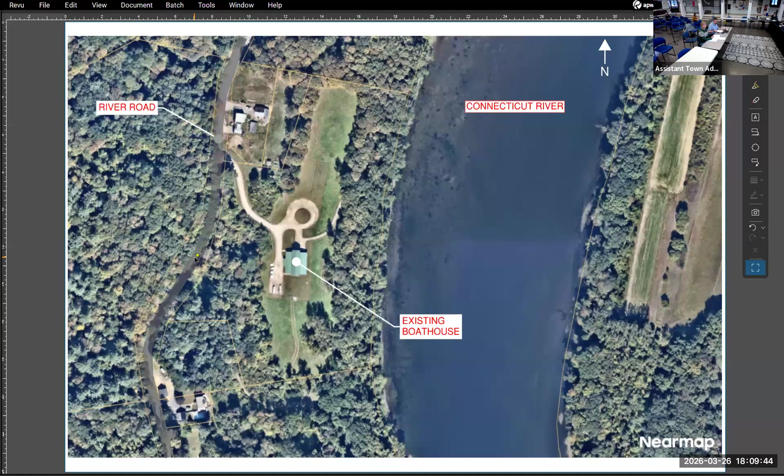This evening's project is the Deerfield Academy Boathouse, situated at 518 River Road in Deerfield. As shown on screen, this is the existing site. North is the top of the page. River Road is on the west side, and the Connecticut River bisects the middle of the screen.

Now with the page oriented north, this is the existing conditions plan. The Connecticut River is now at the bottom of the page. Our area of work is situated to the north and south of the existing boathouse and along the west side.

The Academy is proposing to install a new shed for storage of crew boats during the winter months, as well as remove a small portion of the gravel driveway just north of the existing boathouse and replace it with porous bituminous pavement for washing down the crew boats. The grass circle in the middle of the gravel turnaround will have its loam removed and replaced with gravel removed from establishing the porous bituminous pad.

Stormwater management for the project will be accommodated through a bioretention swale located just east of the storage shed, highlighted in blue, south of the existing boathouse. The porous pavement pad itself will offset stormwater runoff from washing activities, as it sits on a full gravel substrate that will accept all that stormwater.

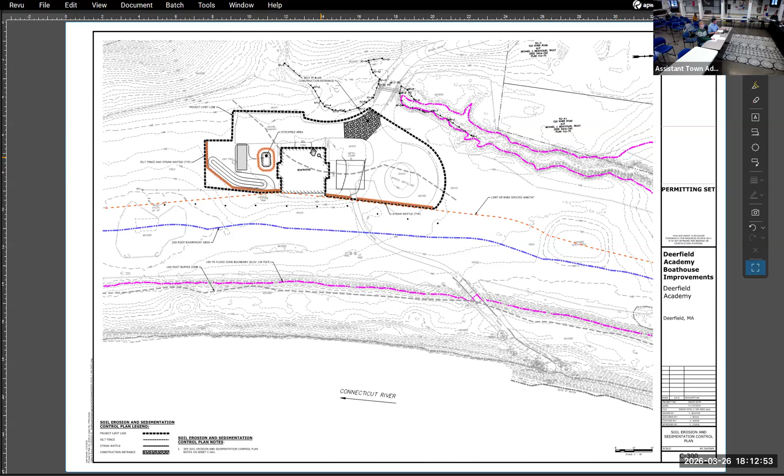Any questions from the commissioners? Before you ask, I'd point out you can see in this shot the limits of the riverfront, the 200-foot riverfront, the 100-foot buffer zone on the lower side, and on the top side, right on the border of their scope of work, on the bottom side is the limit of the rare species. So everything proposed is being done outside of those jurisdictional areas. It's a little hard to read the font in our meeting packet, so I just wanted to point that out.

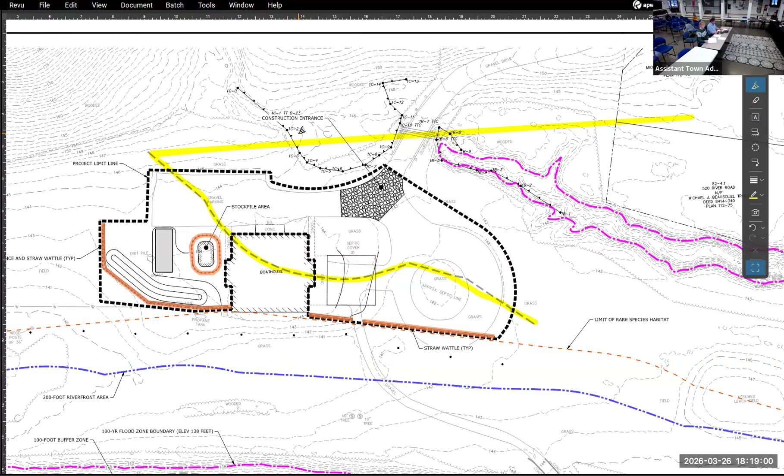John Libby: I'll make a motion for the RDA Deerfield Academy Boathouse application at 518 River Road to be a -2 determination with the use of the standard Deerfield order of conditions. Motion by Ben Byrne—I'll second. Okay, we got a motion and a second. Any further comments from the commissioners? Seeing none, then there's a motion on the table. I'm going to take a roll call vote to accept that motion.

Sean Libby—John Libby, aye. Ben Byrne—Ben Byrne, aye. Kate Devlin—Kate Devlin, aye. Pete Law, aye. Thank you very much. So that's good, -2, and we'll get that put together. Great, thank you. Thank you.

All right, thank you both very much, appreciate your time. The next item this evening on the agenda is Mass DOT, 5 and 10 in Mill Village Rotary. Considering a notice of intent filed by Mass DOT District 2 for intersection improvements on Greenfield Road, routes 5 and 10, at Mill Village Road and North Main Street, Mass DOT project number 613708.

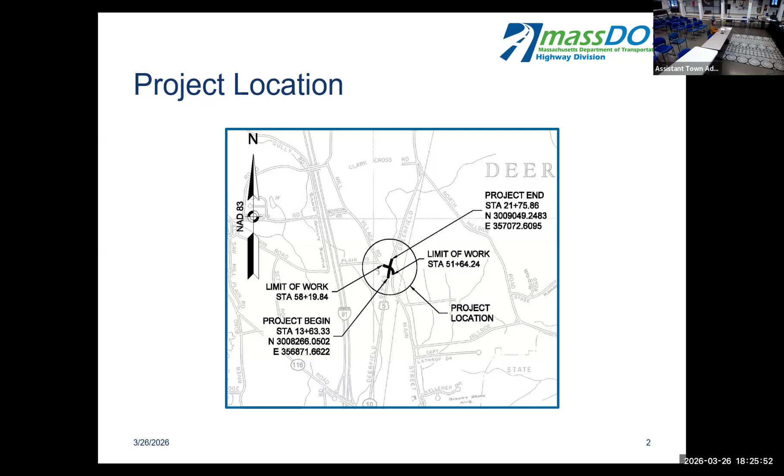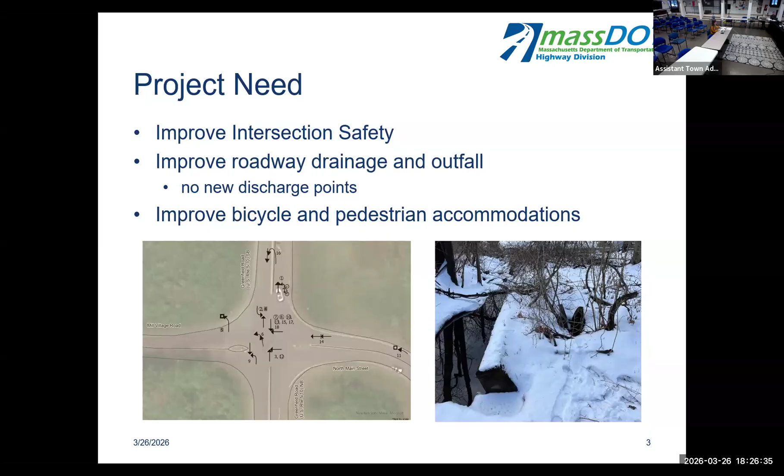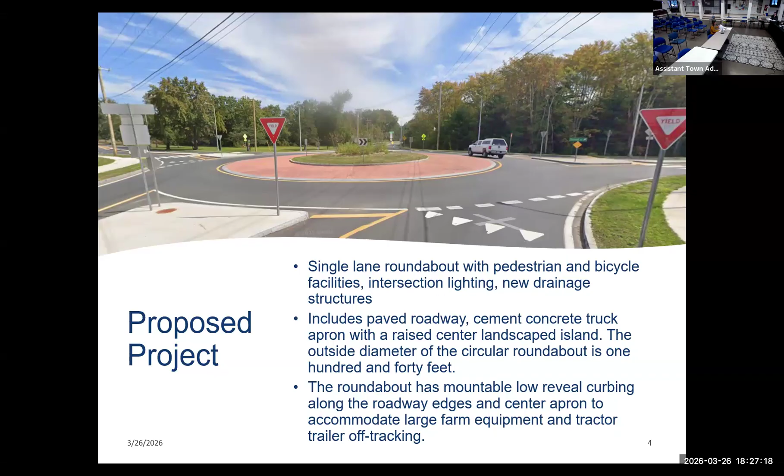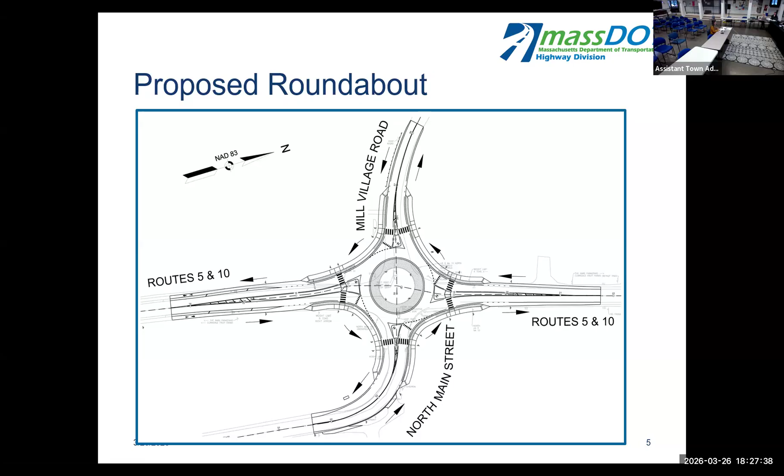For the proposed work in resource areas, there are proposed permanent impacts to bordering vegetated wetlands for the roundabout. Through the design process, we have steepened the slopes of the roundabout to minimize fill within wetlands. A grass swale is also proposed in the southwest corner of the roundabout, along with temporary impacts for access, utility work, and outfall removal.

There are beneficial impacts to bank from removal of the failing headwall and moving the proposed stormwater outlet further into the uplands, and permanent impacts to riverfront area from new impervious surface. The project also proposes sediment and erosion controls at the limits of work.

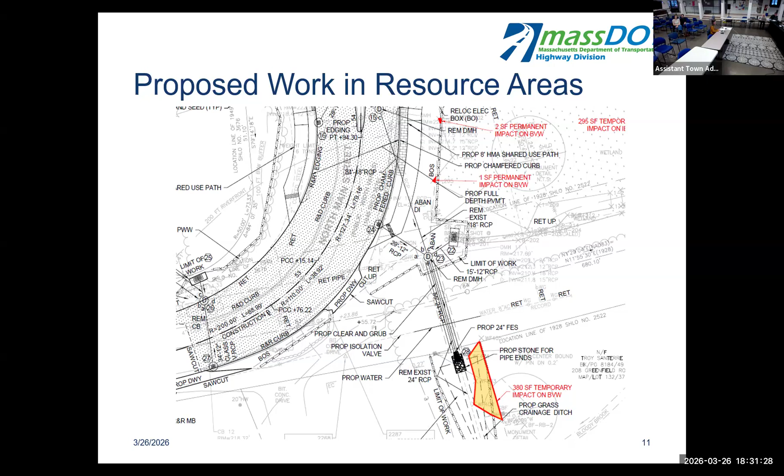At the bottom, you can see the proposed temporary impacts for the relocation of the outfall, in the blue circle there. The next few slides go over the outfall. I know in the field, Pete had a few questions about that.

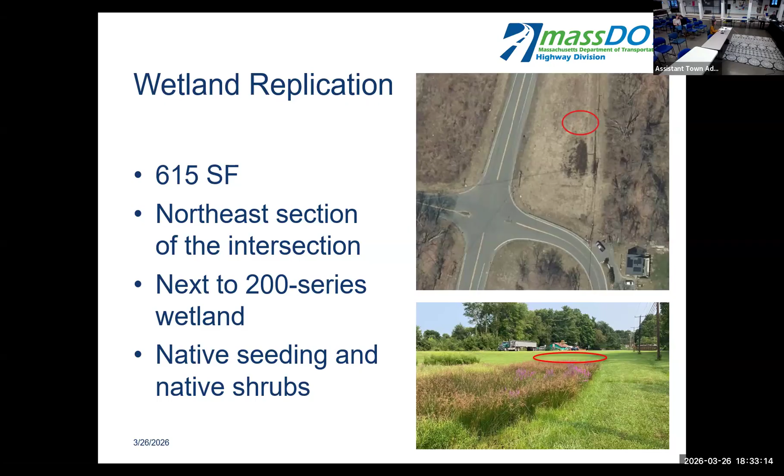We are proposing wetland replication, currently at 615 square feet in the northeast section of the intersection, adjacent to the 200 series wetland. The red circle on the top photo shows the approximate location, and the bottom photo shows the view looking north from the power line where that is proposed. We're proposing native seeding and native shrubs.

For stormwater, this project can be considered a redevelopment project. It meets standards 1, 8, 9, and 10 fully, and meets standards 2, 3, and 4 to the maximum extent practicable. The project incorporates deep sump catch basins, and some catch basins in the existing closed drainage system are being brought offline, which will help with water quality. It also pulls the Bloody Brook outfall further into the upland instead of discharging directly into Bloody Brook as it does under existing conditions.

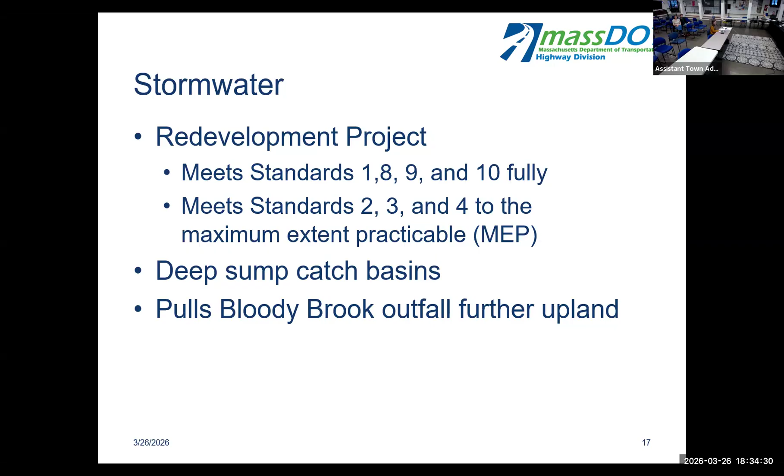For regulatory compliance, this can be considered a limited project under 310 CMR 10.53F, which allows for, in part, maintenance, repair, and improvement of existing roadways and improving inadequate drainage systems. Section 7 of the NOI has more details on how the project complies with the different standards. MassDOT will also be submitting an Army Corps of Engineers pre-construction notification due to the proposed fill in wetlands.

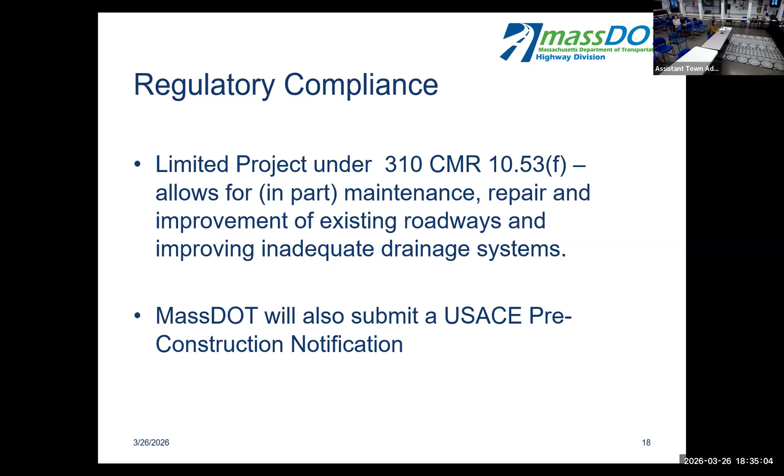In summary, MassDOT created this project at the Town of Deerfield's request. It will improve safety and accessibility at a high-crash intersection. The project results in impacts to bordering vegetated wetlands, riverfront area, and bank. We propose wetland replication, and impacts to resource areas were minimized while meeting the project's intended purpose and need.

One other thing I wanted to mention is that this project does include bike and pedestrian accommodations in the form of a shared use path. The MassDOT standard is a 10-foot wide path, but we were able to get an exception from our Complete Streets program to have a narrower path to minimize the impacts to wetlands.

One more thing I wanted to mention that's not directly related to this project - there was mention of a desire for more conservation type mowing. I wanted to let the commission know that MassDOT is conducting almost 11 acres of reduced frequency conservation mowing in Deerfield along I-91 near the Deerfield River. This is part of MassDOT's programmatic approach to benefit the proposed threatened monarch butterfly, under the candidate conservation agreement with assurances with the U.S. Fish and Wildlife Service. We haven't publicized it much, but this is reduced mowing frequency in areas where it doesn't conflict with sight distances or safety of the motoring public.

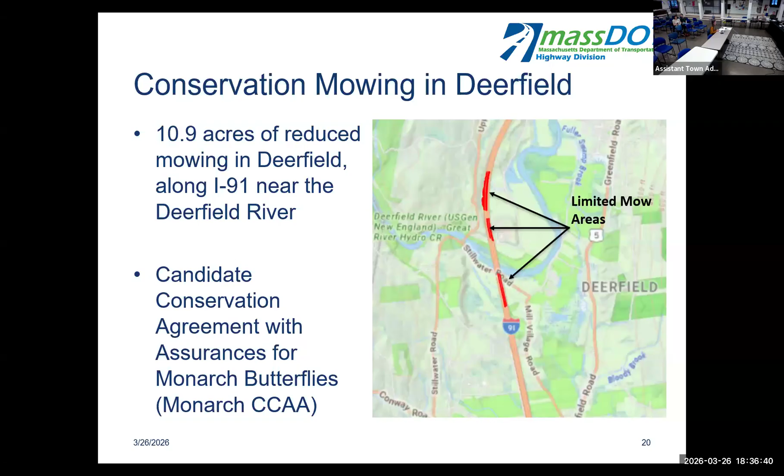I'll leave it there. Happy to return to any slides or answer any questions from the commission.

Great, thank you. There's a lot of stuff there - the packet's pretty thick on this NOI. I have several questions or things to point out, but anything from the other commissioners off the bat? Kate, Sean, Ben? Negative. Not at this time. Pete said not at this time as well. Oh okay, thanks. All right.

On your NOI, page 2, under section 2.1, under the inland bank, second sentence - could you show me where the flag series B100 through B105 are? Sure, let me go back to the slide showing the mapped wetland features, and I can show this feature here. I believe it's listed B100 through B105.

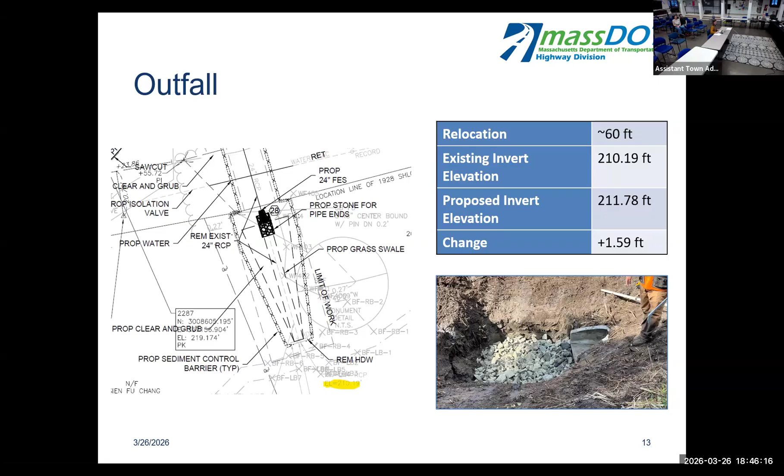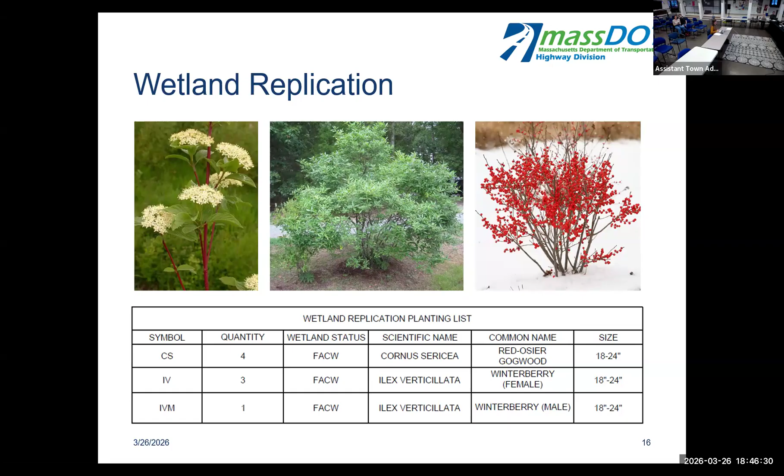Okay, and jumping ahead, where the wetland replication restoration area is proposed, you gave us a little information, the dogwood and winterberry, we're putting in at 4 and 4. And what's the area? What's the linear feet of that and the width? I know it's 615 square feet, but I don't know the length and width. So if we did 20 by 30, seems like a limited number of bushes for that area.

So we may want to look at an increase in the number there, and maybe it doesn't have to be that size, but something different. And then I think you also note that's a native seed mix, and we need to know what that seed mix is and what it constitutes there.

And we were looking, we always look to, and I think one of your slides at the end noted the monarchs, but we always look for pollinators and pollinator-friendly type of species, as well as species that are resilient. We do want to look at the mix, so if you could take a look at what you're proposing there for both pollinators and so forth.

It also says the wetland replication restoration should be conducted under the supervision of a wetland specialist with at least 5 years experience. It wouldn't be me. It wouldn't be you, it wouldn't most likely. I am a wetland scientist with more than 5 years of experience, but it will most likely be an independent one. We will need the name, the contact information, and the experience level so that we can approve it beforehand.

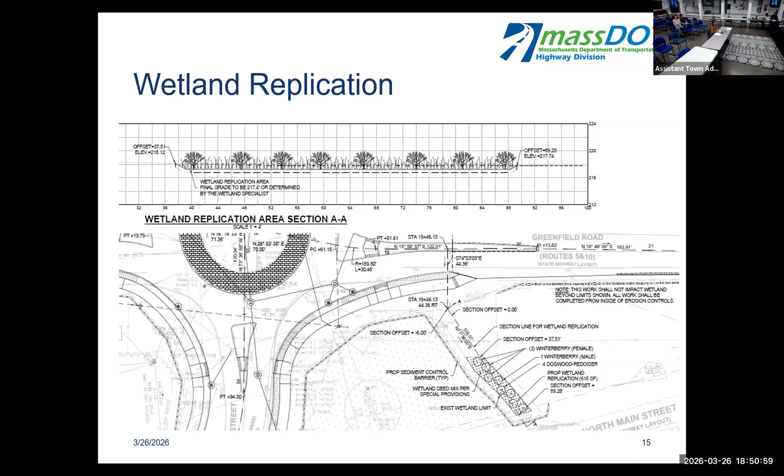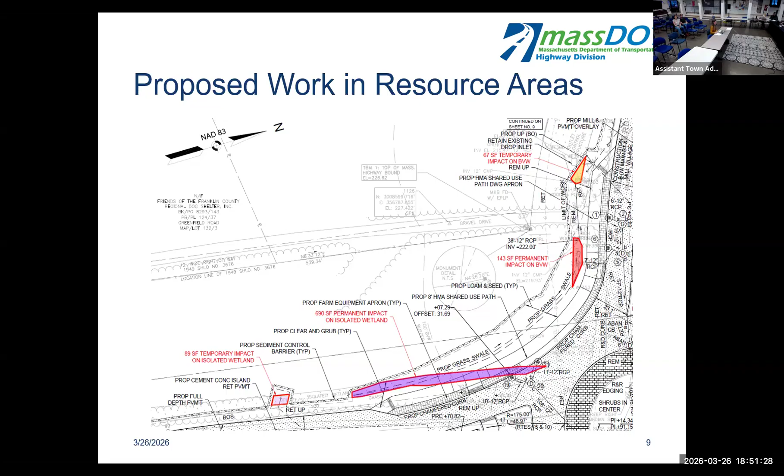We'd also like, I guess we'd call it both on the east side and west side, on the northern side of the rotary. If we start on the west side first, where we talked about that area, we'd like to have some restoration done there and take care of that improper access area and culvert. But we should also have no-mow signs in that area at the boundary of your property from the other side in, and also from 5 and 10 in. So you guys have the right to mow for sight of vision and so forth as far as you can, but we want to minimize it on both sides, east and west, with no-mow signs.

And we'll talk about what we should put in there when we get that repaired. But they should also potentially, if you can't repair it, then at a minimum have to be like a gate or something there, so there's no access point onto that road.

And I'm a newbie here in town, I've only been here about 40 years, but I do drive up and down that road quite a bit, and you see a lot of folks drive into that access road because they went too far. They want to turn around, they come back out. So it's really become a safety issue as well, which is high on your concerns on the rotary, but we don't want people to pull in, pull out, and so forth.

That's kind of the criteria there, but we want to start the mowing there, and then on the east side, where the replication area is proposed, that area has been mowed pretty much to a lawn level, and that should go back to a natural state of a no-mowing area, maybe once or twice a year, avoiding the times with various animals out there. So we generally try to do it later in the year, but yeah, we would look at a no-mow there.

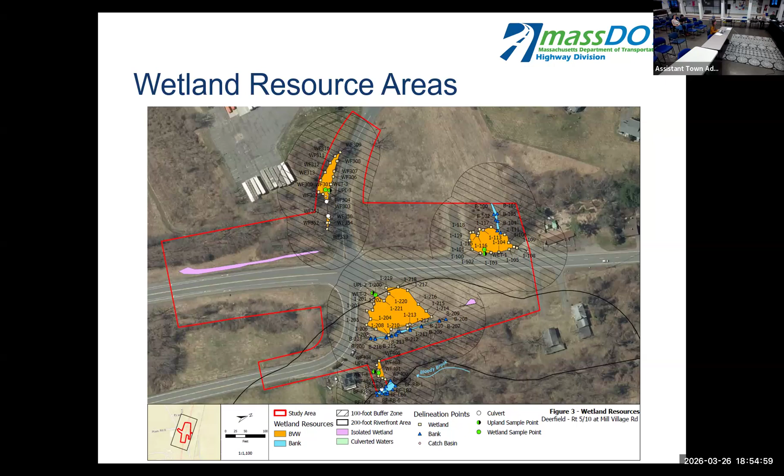Just a quick question on the replication area - what was the ratio from the amount that you're taking away? We're like 1 point something. I'd have to double check, but I believe it's 1.6 to 1 currently, something like that. So that's generally good - the requirement is a 1-to-1 ratio, and we often ask for 2, but a 1.6, 1.7 is in a good spot.

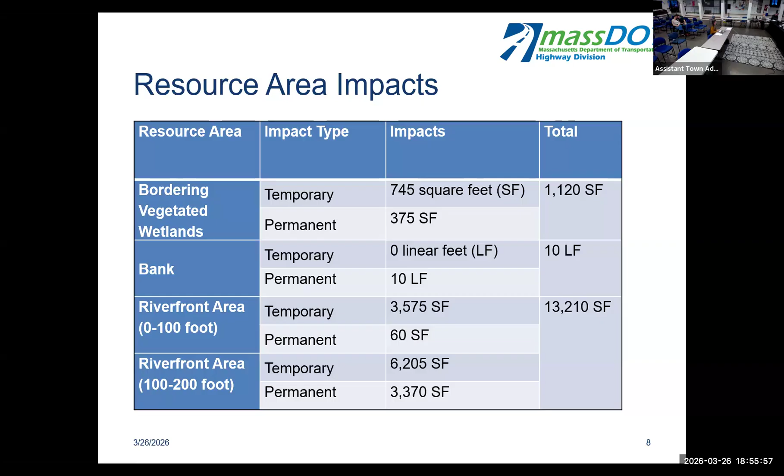And there was one other thing I had someplace - yeah, in one of your charts, I didn't see it up here and I don't know what the name is. It's in the stormwater management report. It's this guy - oh yes, I actually thought that might come up, so I have a couple extra slides at the end here. Were you interested in the existing watershed or the proposed? The existing area and discharge points, and then the proposed ones.

Okay, so this is currently showing the existing watershed, and discharge point 1 here is the one that we've been looking at, the existing outfall, which we're proposing to move upslope. And then discharge point 2 is where this wetland area enters the catch basin, and then goes to the north and discharges outside of the project area. We're not touching that discharge point.

So EX-2 is that small basin on the upper side, on the west side? And then it crosses over underneath the highway? Yeah, so all the flow goes up to the north here. And then I believe it discharges actually on that same side into Bloody Brook to the north, because it crosses, goes up a little bit and then comes across and back down through. Okay, so that is the one just above where that access road is and where the culvert is, and that leads more water that comes down through. There's a swale coming this way, but as they change that, there's more water coming through that - so that's that little catch basin that in the spring backs up there.

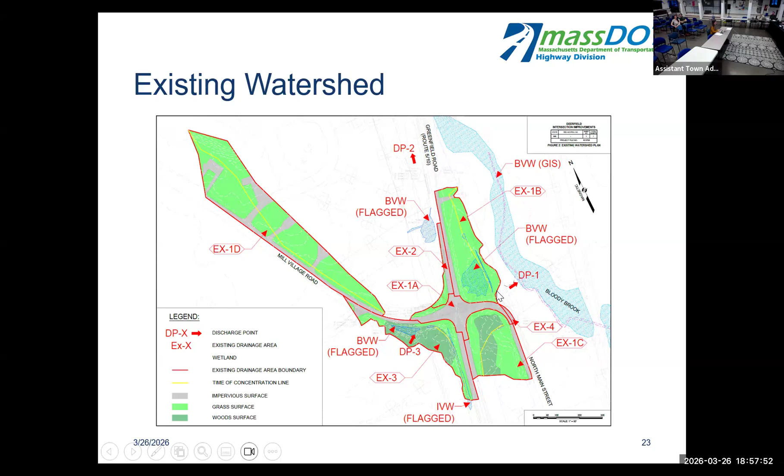And just to clarify, this area where the new swale is going in, that goes to discharge point 3 and enters into the drainage system there. And so we're not talking about any new discharge points? Nope. Well, there's only one entry into Bloody Brook, one discharge there. So no additional new ones coming in and none going out. Nope. Okay, all right.

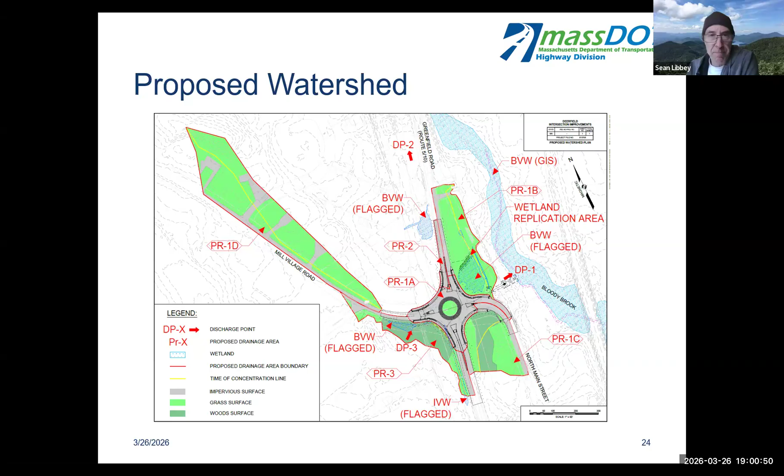Ben Byrne, I'll second. Okay, any other comments from the commissioners?

If not, there's a motion on the table to continue the hearing to the 30th. Take a quick roll call vote on that. Sean Libbey, aye. Ben Byrne, aye. Kate Devlin, aye. Pete Law, aye. So we'll close out the hearing for the moment.

Anything you can get us beforehand, at least 3 days before, is really great. Then it'll give us some time to consider. Yeah, I'll definitely be able to provide those details on the seed mix and a few other more technical things in advance. All right, thank you so much. All right, thank you.

All right, continuing through the agenda item. Other business: Conservation Fund update from the Open Space Committee.

Good evening, I'm Julie Caswell, chair of the Open Space Committee. Joining me at the table is Alan Swedlund, a member of the Open Space Committee, and I'm also seeing Andrea Liebson on the Zoom, another Open Space Committee member. So this is an opportunity to have a conversation between the Open Space Committee and the Conservation Commission.